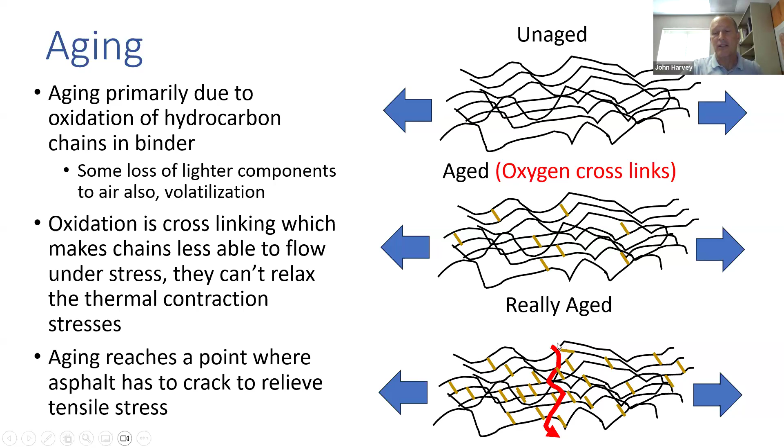Once you have enough of those and we get a contraction, eventually that tensile stress will get higher than the strength, and we get a crack that starts at the top and then propagates down to the bottom.

So that's shown here. Those of you with an engineering background, I always say I don't want to cause PTSD, but if you go back to your statics class, you remember you had one problem where you had a restrained beam with a thermal contraction, causing tensile stress, and you had to calculate what the stress was and whether it was higher than the strength. That's the same thing we're talking about here.

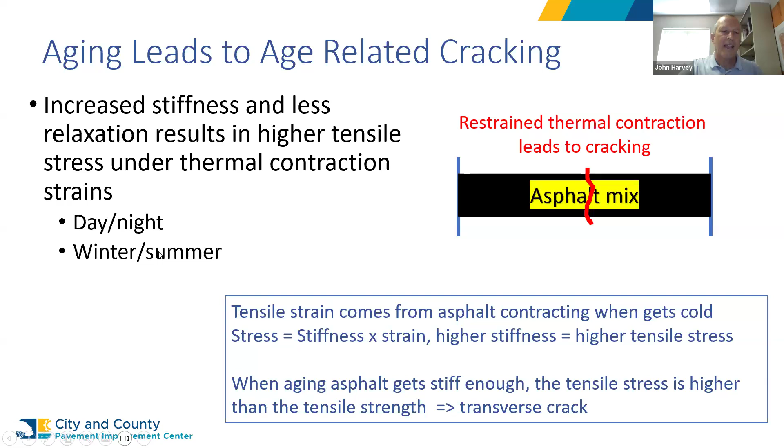But the key is aging causes increased stiffness and less relaxation. And as we have those day and night temperature changes, and it gets cold at night, gets cold in the winter, that's when we get those higher stresses.

So how much stiffer does it get? The initial stiffness - we have a rapid increase in stiffness over the first 5 years, and then we tend to reach a steady state increase in stiffness.

When you get out to about 15 years, depending on the climate region, a hotter climate region will get there faster - Central Valley, desert, Inland Empire. A cooler region will get there slower - north coast, up in the mountains, south coast.

But you get 2 to 5 times stiffer. That gives you an idea - it's 200 to 500% stiffer. And we're losing that ability to relax as well.

If we have good asphalt compaction, it makes the surface less air permeable, and good asphalt compaction is going to help slow down that aging and potentially cap off the maximum aging that occurs, because if the hot air can't get into the mix, the hot air can't cause aging.

Okay, so age-related cracking leads to top-down cracks. It cracks first in the transverse direction, then typically it will crack again in the transverse direction, almost halfway between the previous cracks. Here we can see those transverse cracks in my left-hand photo here. Got a little fatigue going on over here.

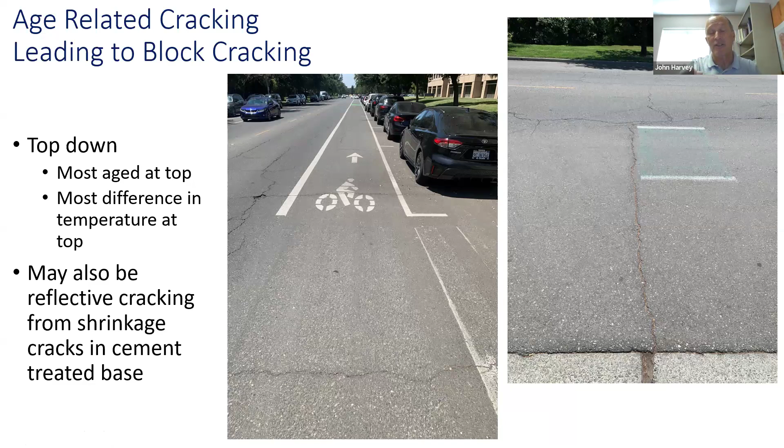Now, if I have existing age-related cracks under the new asphalt, or I have shrinkage cracks in a cement-treated base or something that's been cemented, particularly if the cement content is high, we'll get higher shrinkage. Those will reflect back up.

So, for age-related cracking, what are the strategies? Well, the first strategy is to use mixes that are softer at low and intermediate temperature. That sort of means around 50 to 70 degrees, and then whatever low temperature means - whatever your coldest temperatures are.

We need to particularly focus on softer materials in the top 2 inches, and then we worry about it to a lesser degree down to 4 inches. And if we've got pretty good compaction, we really don't have aging below 4 inches.

So one of the ways to do that is if you're currently specifying a 64-16 or a 64-10 asphalt, if you go to a 64-22, that -22 means that material is softer at lower temperatures. The -16 means -16 degrees Celsius, and you'll have the same properties with your -16 at -22 if you specify a -22.

Keep the surface protected from aging. This is what your preservation does - your fog seals, your slurry seals - but you need to do those ahead of the cracking. Those are not really there to seal the cracks for very long. They're there to slow down cracking and aging, and slow the aging process.

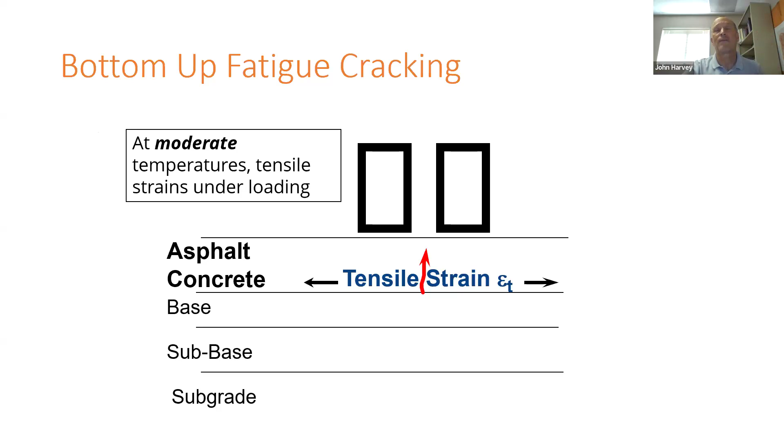Preservation does not stop or really do much about fatigue cracking. Preservation is about slowing age-related cracking.

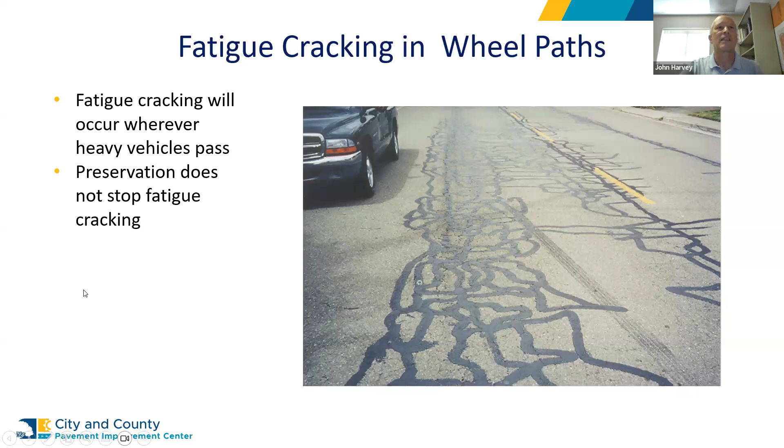So fatigue cracking in the wheel paths—there are only 3 wheel paths here because it's a narrow road, this one happens to be up in the East Bay Hills, but you can see it's in the wheel path. It's structural. It's going to happen if you have the heavy vehicles. If it happens, you need to replace the structural capacity. Preservation doesn't do much of anything about this.

Okay, now I mentioned reflective cracking. If you have existing cracking in your asphalt or concrete or cement-treated layer underneath, and you put new asphalt over the top, that is a stress concentration.

The same process of fatigue and age-related cracking—thermal expansion and contraction—is going to open and close that underlying crack, and heavy loads are going to bend over that crack. Except now it's going to go faster, both of those processes, because it's a stress concentration, and that will drive that crack up to the surface.

So if you're doing a mill and fill on existing cracked stuff, the cracking will tend to come up faster than if you had a solid new asphalt layer of the same thickness, even if it's 1.5 inches, because of that stress concentration.

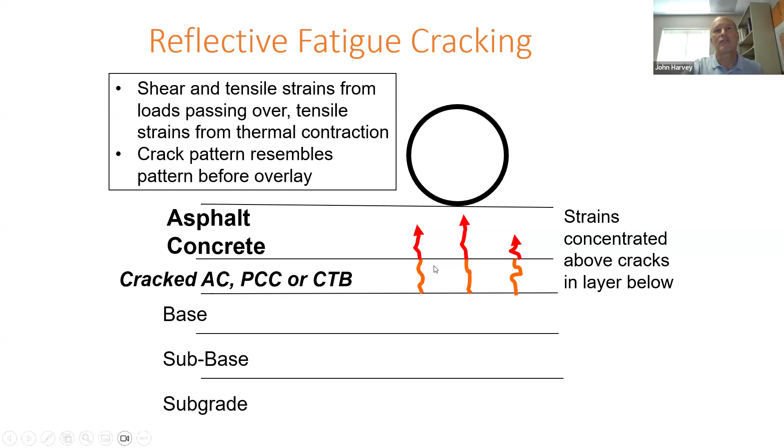So for load-related cracking, the strategies are—it eventually becomes alligator cracking, and then the pieces come out, and that's what a pothole is. Pothole is the whole end of the process.

Surface treatments again do a little bit to slow that, but really those are about age-related and block cracking. You can do periodic mill and fills or dig-outs in isolated areas if you have localized deep cracking, but these become much less cost effective once alligator cracking is extensive.

And you want to consider, this is where if you get extensive cracking, you want to consider going to the cold recycling that Dave's going to talk about—whether it's age-related top-down cracking, where you go partial depth, or you've got cracking all the way through the asphalt layers, and maybe even some contamination or no base underneath, that's when you want to start thinking about cold recycling.

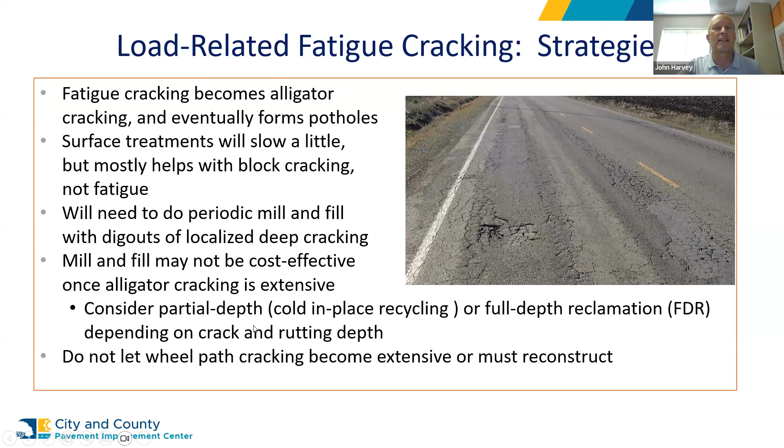So to summarize: desired mix stiffnesses—age-related cracking, which leads to block cracking, happens in all pavements everywhere, all the time. You want to be softer at intermediate and low temperatures in the top 4 inches, particularly the top 2 inches.

Polymer modification—using polymer modified asphalt on the surface or rubberized hot mix—are both great for dealing with age-related cracking because they're nice and rut resistant at higher temperatures, but they stay nice and soft at the intermediate and low temperatures. That's what the modification does.

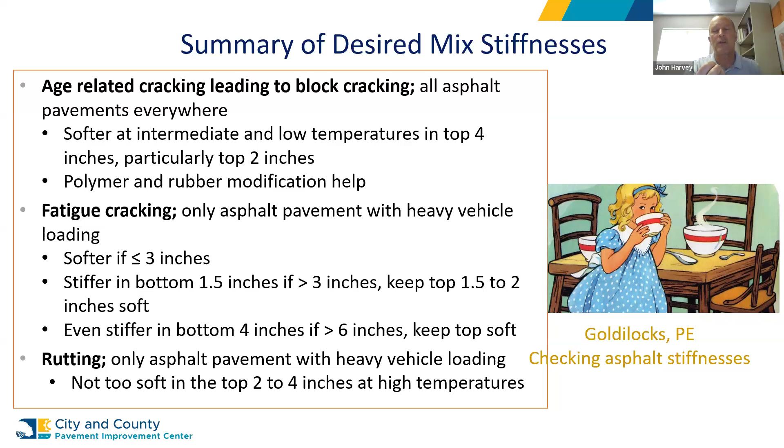I just want to mention that CCPIC has an asphalt specification available on our website. The Caltrans specification is really meant to prevent rutting across the state highway network. It's not really directly intended for residential streets. Our CCPIC HMA spec takes the Caltrans spec and then makes some tweaks on it for your residential mix designs.

Hi John, we have a couple of questions here if you have a moment to answer them. So the first question is, won't using softer oil create more potential for early age rutting?

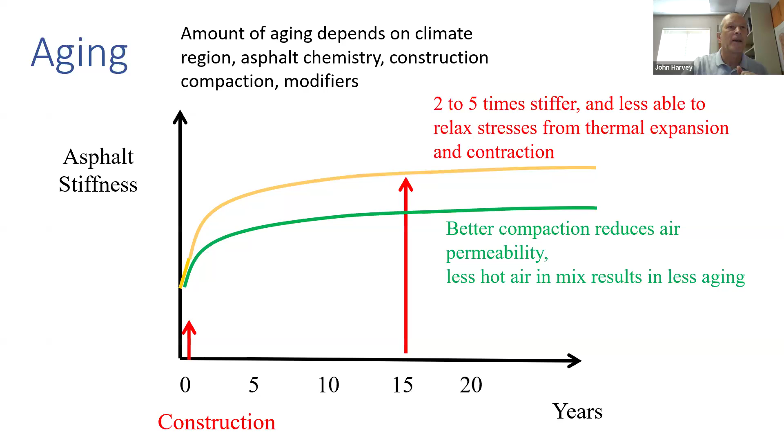Yes, well, the PG specification has 2 parts. The first part is the high temperature - keep the same high temperature of your binder. That's the rutting part, that's rutting resistance at 64 C, that's like 150 Fahrenheit. But what I'm talking about is you can ask for an asphalt that keeps the high temperature, but goes to a lower temperature on the second part of the spec. So go to that lower part of the temperature on the second spec, and you shouldn't be giving up any rutting resistance. Yeah, so that's the answer to that question.

Okay, we have a couple more questions here. Will an AC overlay that is 1.5 times the existing AC thickness control the reflective cracking?

Probably not, unless you're talking about an 18-inch existing asphalt layer and you replace the top 6 inches. If you're doing 1.5 inches, 2.5 inches, maybe getting up to 3, it will help. But remember the age-related reflective cracking is temperature-driven, and the thicker the blanket you put on that, the more you're damping those temperatures. If you've only got a 1.5 inch overlay, it's still getting hot and cold at that crack, an inch or 1.5 inches, and it's doing the expansion and contraction.

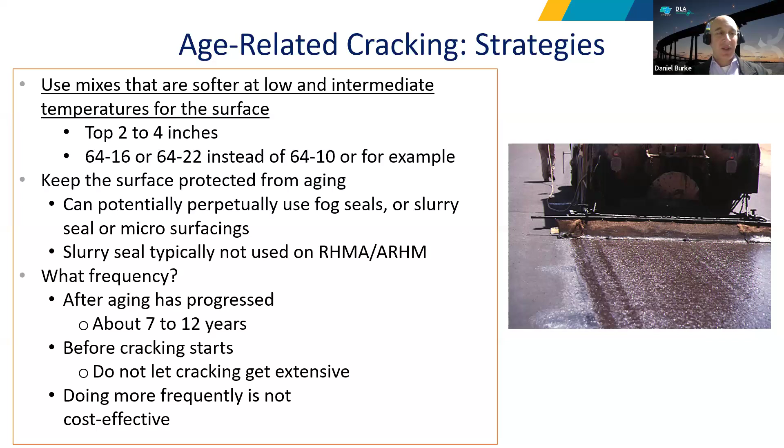Thank you, that is all the questions we have for now. Great, I think I'm going to stop sharing and hand it off to Dave.

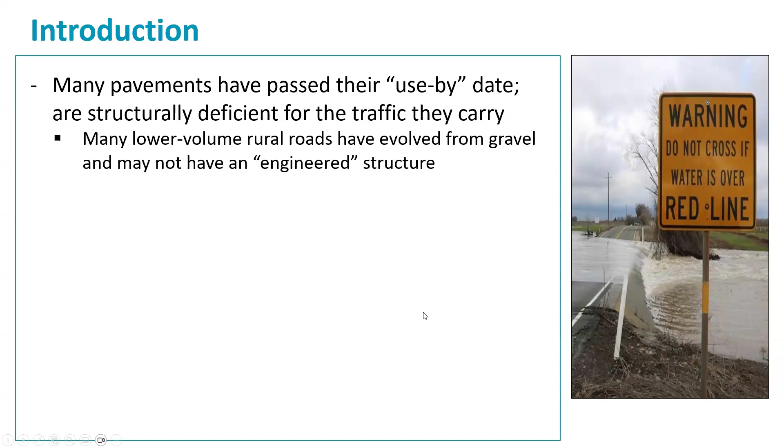So they too are having problems with the traffic that we're putting on them, and we don't have a blank check to go out and rebuild them. So we're doing the best we can with available technologies, which are typically mill and overlay or just an overlay, or a surface treatment, or whatever we can afford to do.

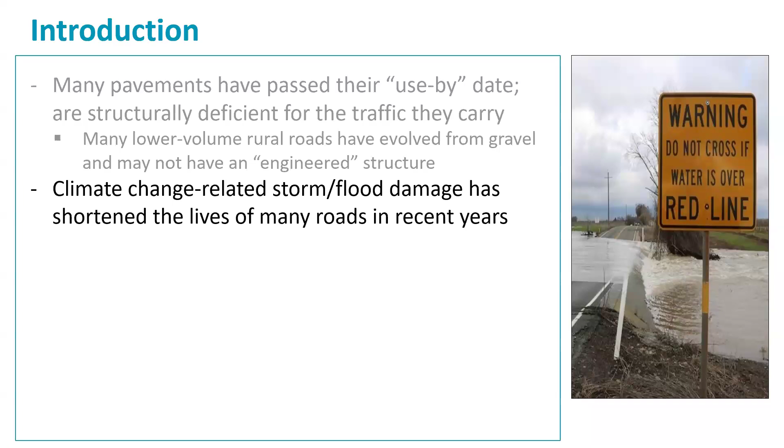Climate change is also factoring in. So we're taking those old roads that are structurally deficient, and now we're seeing more intense storms. We're seeing landslides, we're seeing localized flooding, all of those sorts of things. And this is shortening those roads and also shortening some of those treatments that we're putting on the roads. So we kind of have to come up with doing it better with less.

We need rapid, effective repairs or rehabilitation, whatever we're looking at. We need to do it at the lowest possible cost. We need a little bit more resilience out of it, so we need to make it better than it was before, to be able to handle that higher traffic and the climate issues that we're throwing at it, and all trying to keep the road user happy at the same time. And that's not an easy ask.

And what we're finding is that taking those cracked roads that John showed you, putting thin overlays or surface treatments on top of that, or milling some of the material off and putting a new overlay on that, are just not cost effective. They're not lasting very long, and those distresses are coming up. And we need to make better use of our money.

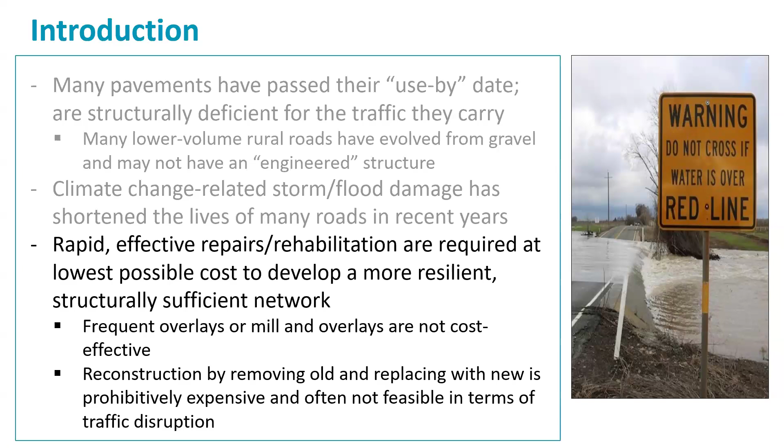The same issue in terms of, if they're completely shot and the mill and overlay is not an option, pulling out all of that old material and replacing it with new material is cost prohibitive. And generally not feasible in terms of being able to handle traffic. If you're in an urban area, people need to use those roads. They don't necessarily have an alternative route to get out of their homes and go to work.

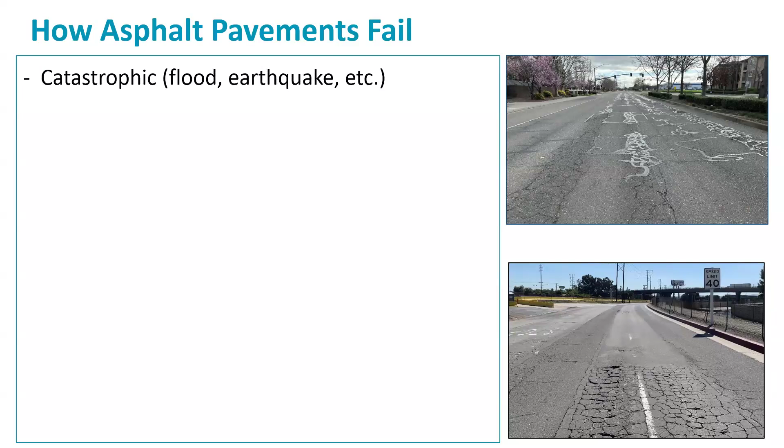So John covered the failures, so I'm not going to go into that. We obviously have catastrophic failures, we have the top-down distresses that John talked about, and then we have the bottom-up distresses. And this is where we think of cold in place recycling, because whether we have top-down distresses or bottom-up distresses, our traditional toolbox of solutions is either a surface treatment for some of those top-down distresses, or a mill and overlay or an overlay on those bottom-up distresses. The problem is that if we don't get to the bottom of the distress, then that distress comes back up again. And John went into that, and I don't need to do that.

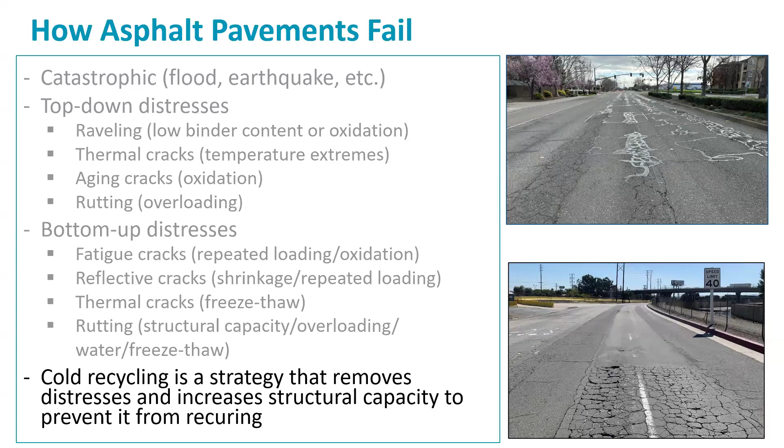But cold recycling, if we use it appropriately, allows us to remove all of the distresses. And if we can, we increase the structural capacity to prevent those distresses from recurring. So we have this situation here, and we put a thin overlay on the top there. Total waste of time, very expensive, and not sustainable in terms of using your maintenance funds.

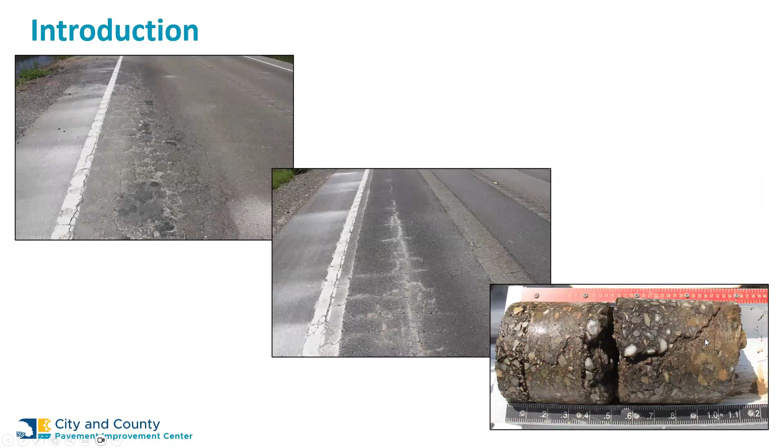Deeper problems here. We've got some serious fatigue cracking in the wheel path. We can see a lot of pumping. Doing a wheel path dig out on this, we can see that didn't work. This photograph was taken about 2.5 to 3 years after the dig out was done. And you can see what we've done is we've been fiddling around on the top here where the major problem is down at the bottom. This core was taken out of this layer here. So we really want to make sure that we get to the bottom of this distress so this sort of thing doesn't recur. So that's also just temporary, not sustainable.

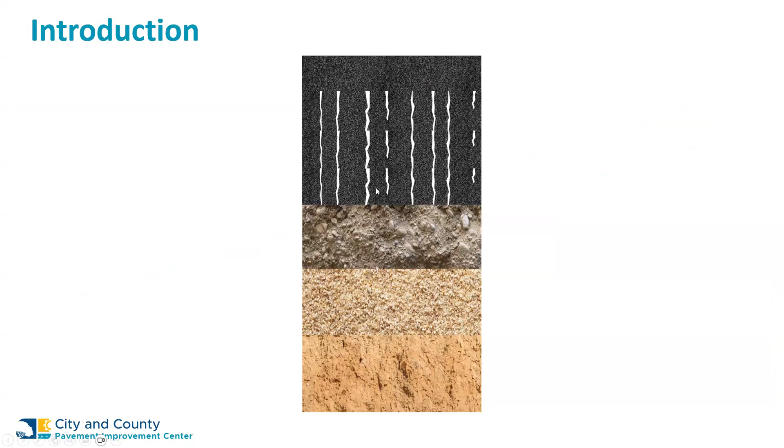So if we do it as in a schematic in this picture here, and we put an overlay on the top there, or we mill some of it off and put an overlay on it without getting to the bottom of it, that is, like we said, temporary, expensive, unsustainable, simply for the reason that those cracks are just going to come back up again because we're taking care of the top when the problem is down at the bottom. So really what we want to do is recycle all of that material.

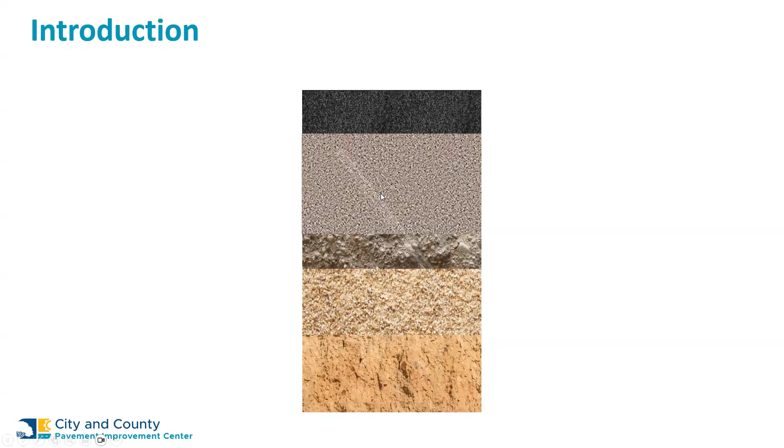There's nothing wrong with the materials. They're just aged and they're a little deficient in terms of structure. We can add a recycling agent to this recycled layer, get rid of all the distresses, put a new surfacing on top there. And that's really what we're looking at, because we believe it's going to be much longer lasting. It's going to be more cost effective, and certainly sustainable in terms of how we use our maintenance and rehabilitation funding.

So let's touch a little bit on the types of cold recycling. I'm sure you're aware of terms like cold in place recycling, full depth reclamation, deep in situ recycling, cold foam in place recycling. There's probably 100 acronyms for all of these things, and those are all legacies of history.

Equipment manufacturers adapted existing equipment to do recycling. They would take a milling machine and add an emulsion bar to turn it into what we'd call a partial depth recycler, able to handle the top 3 to 4 inches of material and give us a recycled layer. They would take a stabilizer or reclaimer, add some bars, change the teeth configuration, and give us a machine for full depth reclamation.

Since recycling has taken off, the equipment industry has done a lot of developments on their machinery. We have a single machine that can go anywhere from 3 inches to 12 inches of material, throw it out the back, and give us a good layer we can run through a paver if we wanted. We still have the modified wheel versions that can crush aggregate and move material around a lot.

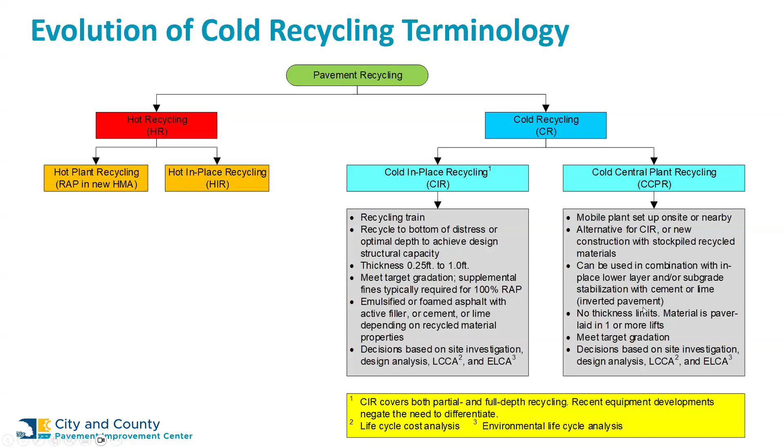So we have a lot of tools, a lot of ways of doing it, but we can achieve a lot of things with that. If you haven't seen it—and I'm sure most of you have—this is a quick example of a machine.

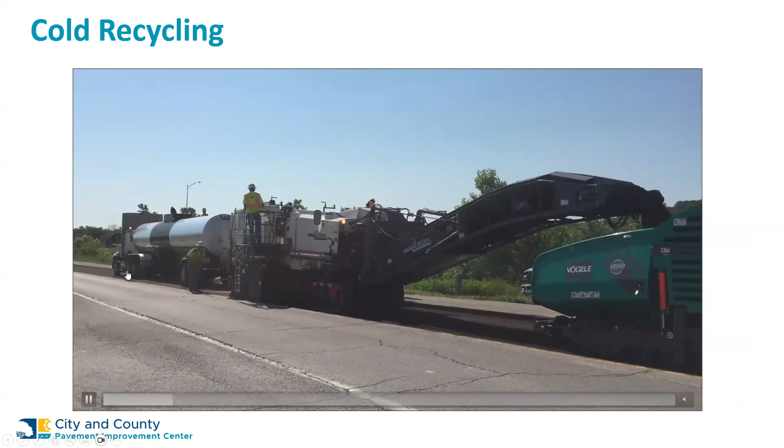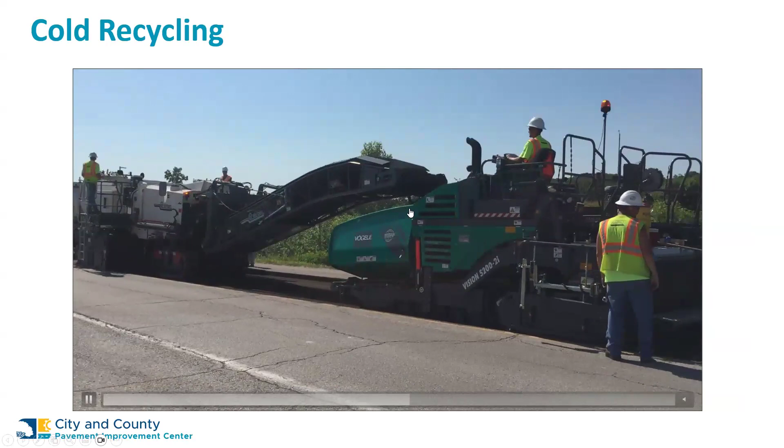So we spread active filler out the front if we need to. We run emulsion or hot oil in a tanker through the machine. It mills up and processes that material, either putting it out in a windrow or dropping it straight into a paver at the back, which puts it down in a nice mat.

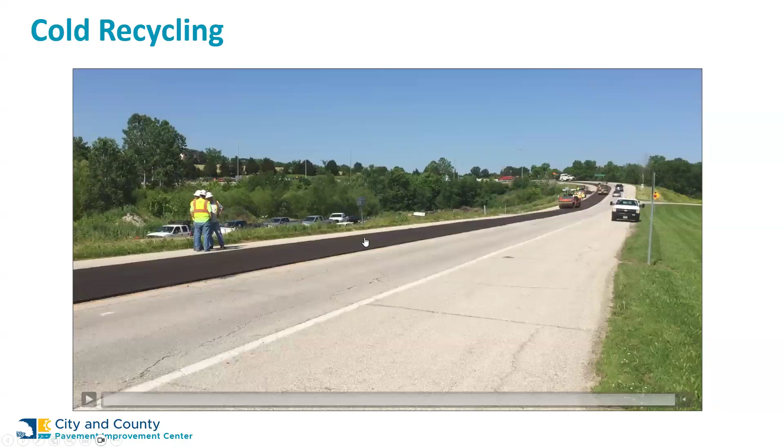Let me fast forward here so you can see the compaction. We have rollers at the back there, and we'll be able to put temporary traffic on top of this layer for 10, 15 days, a month or so while we finish the project. You can see the distresses popping up here—literally we can turn an old broken up road into a brand new road at walking pace.

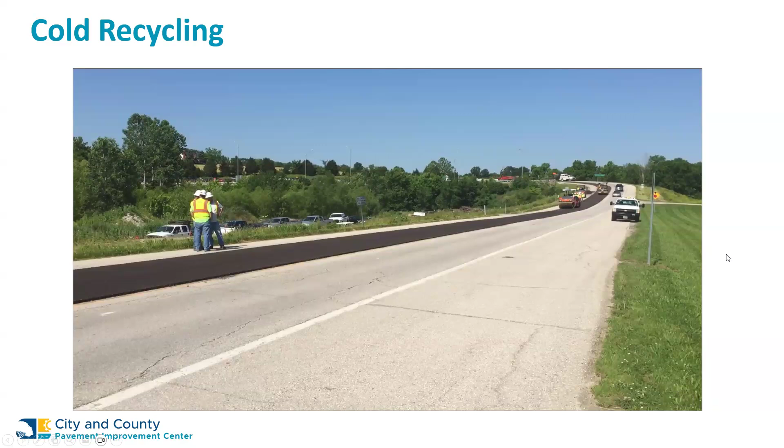Really, really good strategy. We can alter the depth and the recycling agent depending on what we want to achieve with that road. We can do it in urban areas, we can do it in rural areas, under traffic.

Really quick, and the beauty of it is we're using all of our in-place materials, and we can get traffic on here really quickly after we've finished at the end of the day. Within an hour or so we can put temporary traffic on the road and then come back and pave it later. We do generally need a thin surfacing on top just to keep it all in place.

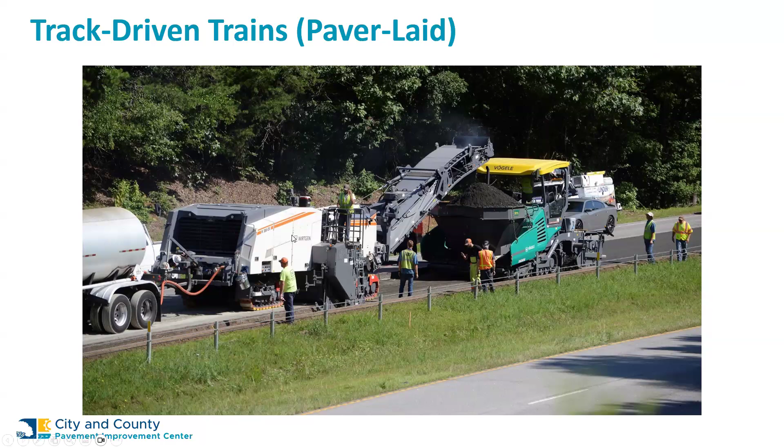Thank you, thanks Dan. I've pretty much covered this one. So that is one example of a new generation recycling train to do full depth. This is something that more of you might be a little bit more familiar with - still really good machinery. It only has an 8-foot wide setup here, or a 2.4 meter drum.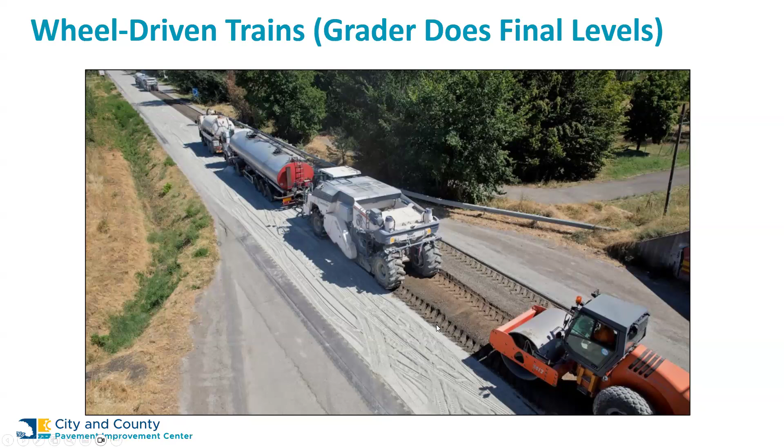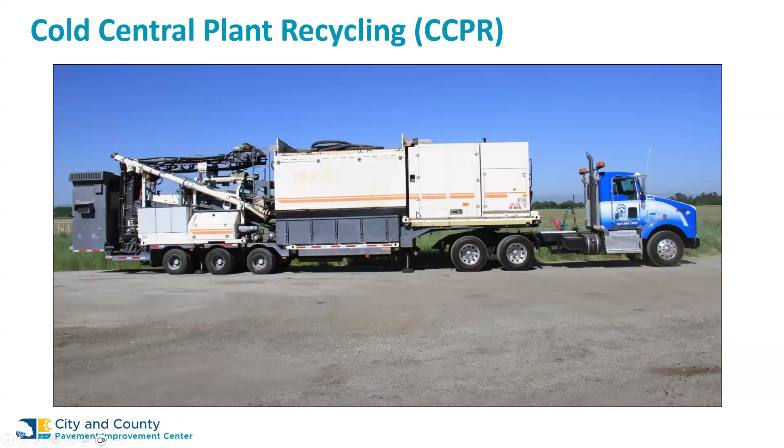And then the cold central plant, this is one example of them. There are 2 or 3 available out there, but this is one. It will handle 240 tons an hour of material. It's street legal, doesn't need an abnormal permit, and takes about an hour to set up. So really quick and an efficient process.

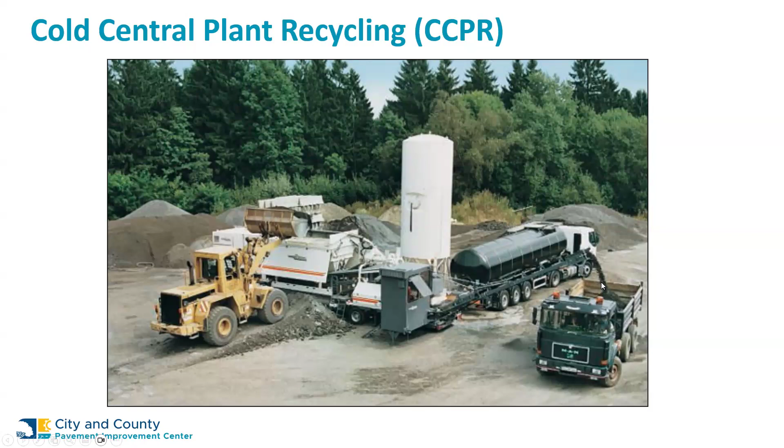This is kind of what it looks like. So your trucks bring the millings off of the project, dump them on a pile. They'll usually run them through a crusher, add the materials to a hopper. We have cement here for our active filler. We have asphalt, either hot oil or emulsion, that we can add to it. And then this process just churns it out and typically throws it back into the truck that just brought the rap millings, and it goes back out to the project and is paver laid like you would do with hot mix asphalt, which opens up a new area as well.

Around the country, and certainly in California, we know down in the Bay Area that we have huge issues with places to put all of the rap that we mill off our roads. Why not use that in new cold central plant layers? So if you're doing reconstruction, new construction, lane addition, new residential areas, we can make use of this cold central plant as an alternative to traditional construction, and get a new life out of that material.

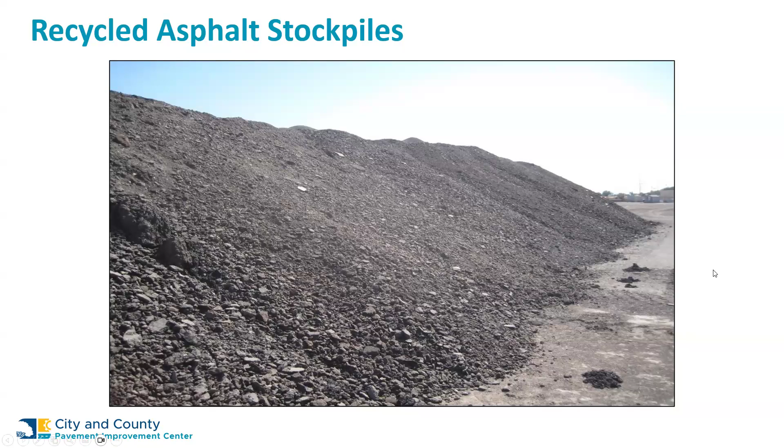Then comes the question of which recycling agent or stabilizer do we use. If we're processing 100% rap, then we stick with asphalt treatments. We either use emulsified asphalt or foamed asphalt. They're going to give you essentially the same result at the end of the day, so we can't say one is better than the other. There are instances when it's probably better for the contractor to use an emulsion, and there are going to be some instances where foam is better. Certainly in terms of the Caltrans specifications, they leave it up to the contractor to decide what recycling agent they want to use, but they're both good.

We also try and encourage adding some fines. 100% rap tends to be a little coarse, so just a low percentage of some finer material helps with the active filler cement that we add down there, just to get a good tight gradation.

If we're going into the unbound layers underneath, we have options. We can do nothing if it's very low volume traffic and we've got good materials down there. We encourage the use of some kind of treatment. So if you've got good engineered materials there, then we'll use asphalt treatments on that. If we've got more marginal materials, high fines content, some clays in there, then obviously we'd move more towards the cement.

The most important thing we're telling people is, don't base your decision on cost, base your decision on the material properties. All of these stabilizers and recycling agents are good, but you've got to use them under the right conditions. You can't just say, well, cement's cheaper, so I'm going to use cement, because that could result in expensive maintenance down the road. If you've got good quality materials and you add cement to them, the cement doesn't really have anything to do but get really strong, and in the process very stiff and brittle, and you run the risk of having some extensive shrinkage cracks in there.

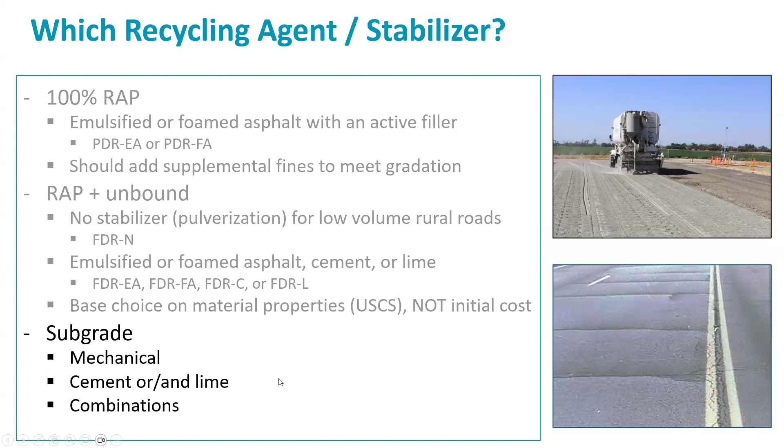So we encourage having an understanding of the materials. We suggest running some basic tests on it to come up with a unified soil classification system, and base your decision on that, which will give you the best possible life out of your pavements. Obviously, if you're doing a combination of cold central plant recycling with underlying stabilization, then cement or lime is usually your primary go-to solution for that.

So here's the basics. If you understand the unified soil classification system, it's based on some very simple laboratory test results. They give you a whole range depending on your gradation and plasticity of the materials. And you can see with our good quality engineered materials, the foamed asphalt and the emulsified asphalt are the preferred choice. Three blocks means good, one means be careful - you want to make sure you're still within the requirements. And then on our more marginal materials, especially on full depth where we're going into the underlying layers, maybe bringing up some clays and a lot of fines, then cement is going to be good.

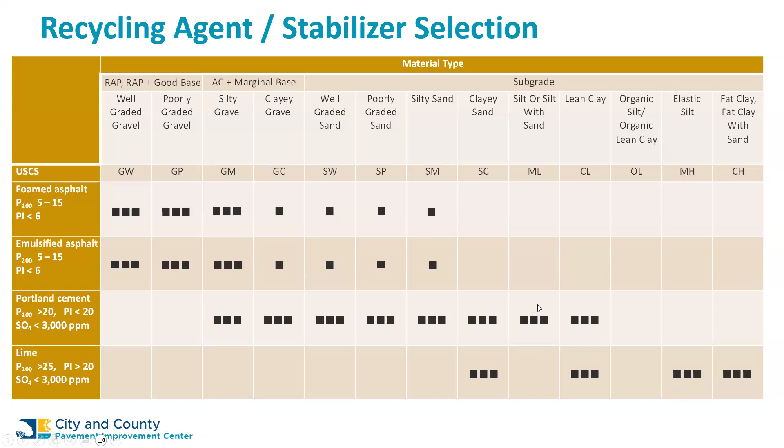With very high clay materials, we'd be leaning towards lime first and then maybe cement after to get the strength. So it's an engineering decision, not just a 'well, I feel like doing cement, so I'll do that.'

So moving on from that, with the background, here are a couple of reasons why you should do it, and these are the sort of areas where I think it's an issue.

This is a project that was done down in Southern California in an industrial area. It was a cold central plant study where they actually turned this really shot road into something that looked really good - 100% reuse of the in-place materials, and just a relatively thin surfacing on top.

So everything we're talking about is actually proven. It's out there in the field. We've got 25 years of experience in California, longer internationally. Caltrans has put a lot of money into doing research on this. So everything we're saying, we can back it up with data and experience.

There are cold recycling strategies for almost any pavement problem. So show me the problem - I'm pretty sure I can come up with a cold recycling strategy to help you there.

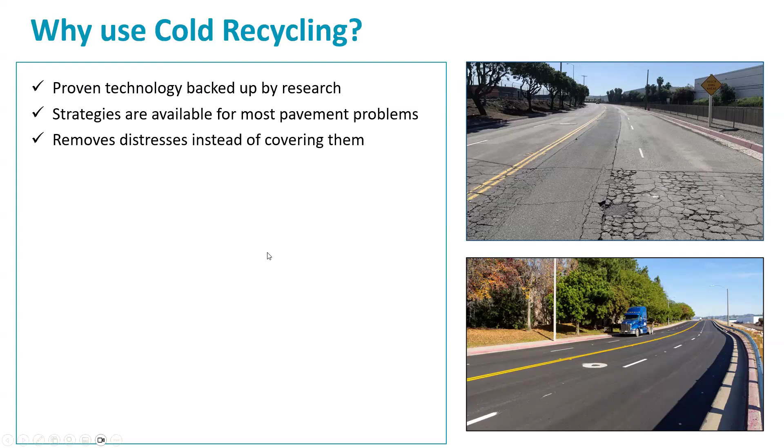One of the most important things, I believe, is it removes the distresses. It doesn't cover them, and that gives us longer life in the pavement.

We have selected strategies that can increase the structural capacity. If we're going deeper than the distresses, mixing up more materials with our recycling agents, we can get structural capacity. If we do a combination of stabilization with our cold central plant recycled materials, we can get a significant improvement in that capacity.

Shorter construction times, less traffic disruption - that's really important, both from a safety perspective as well as a cost perspective. We definitely get extended pavement life by removing the distresses as opposed to covering them.

A big thing for all of you folks that are cash strapped out there - we use all of those existing materials. We've already paid for them. Why take them out and put them on a dump site or use them as low cost shoulder backing or something like that? Let's make use of all of our materials and keep them in the road.

As opposed to taking them out, we require very limited new materials. We might want to add some supplemental aggregate. We certainly need a thin surfacing on top of it, but not nearly as thick as some of our heavy duty mill and overlays that we need to do for a rehabilitation project.

It's definitely more sustainable if we design and build it correctly - removing the distresses, not just covering them up.

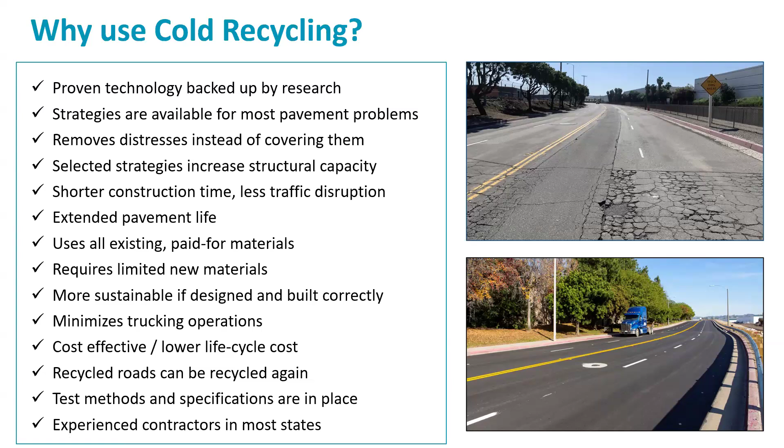And then again, importantly, we do have experienced contractors across California that can do a good job and are well aware of how to do it.

Put another way, if we compare our traditional remove and replace strategies with our cold recycling strategies, some pretty clear differences here. Remove and replace is what it is - we remove and replace those layers. Cold recycling, we recycle to the bottom of the distress. That's a big difference there.

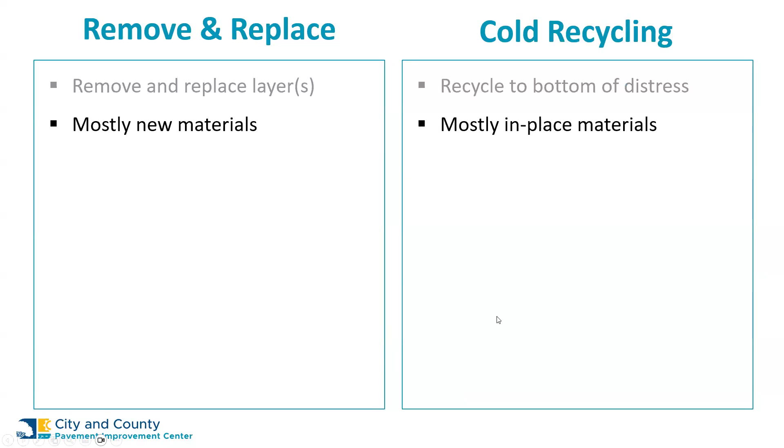Remove and replace, we're mostly bringing in new materials. Cold recycling, we're using pretty much everything in place, just bringing a new thin surfacing over the top of it.

As we go deeper with remove and replace, trying to get as close as possible to those distresses, the deeper we go, it gets more costly and more complex in terms of construction. With cold recycling, no difference whether we go 4 inches or whether we go 12 inches on an in-place recycle.

The only change that's going to come is with the additional recycling agent and active filler that we need to put in to go to that extra depth. The complexity doesn't change, nor does the time it takes. So as you see, the deeper we go, the longer the project duration, the more road closures we've got to have, the more disruption to traffic.

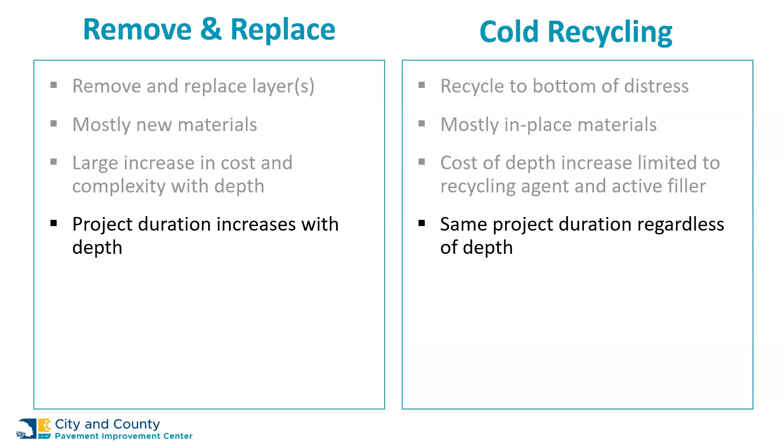With in-place recycling, the duration stays exactly the same regardless of the depth. And if we do a cold central plant, that's also quick, because as we take those materials off, we process them and put them straight back again. The construction traffic for remove and replace - the deeper we go, the more trucks we put on the road. For cold recycling, it's the same amount whether we go 2 inches or 12 inches.

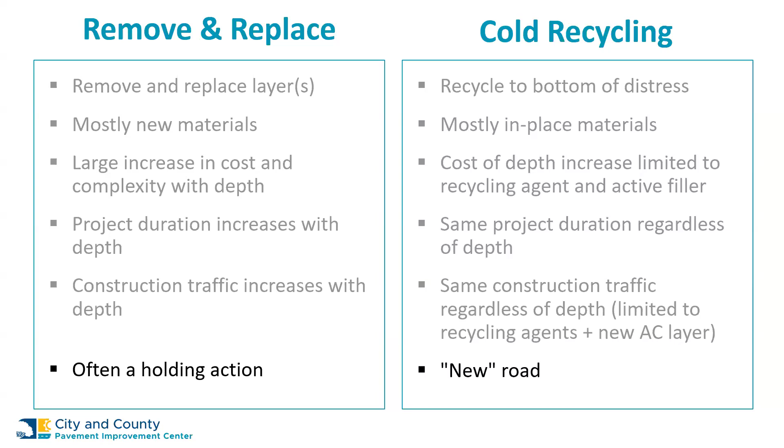At the end of the day, a remove and replace, if we don't get to the bottom of those distresses, is essentially just a holding action. Cold recycling essentially gives us a brand new road to start off with. It is hopefully structurally sufficient for the amount of traffic we're going to carry. So we minimize the amount of new materials we have to bring in, minimize the amount of trucks we put in. We can do it under traffic, and it's really quick - we can put traffic back onto that surfacing within a couple of hours.

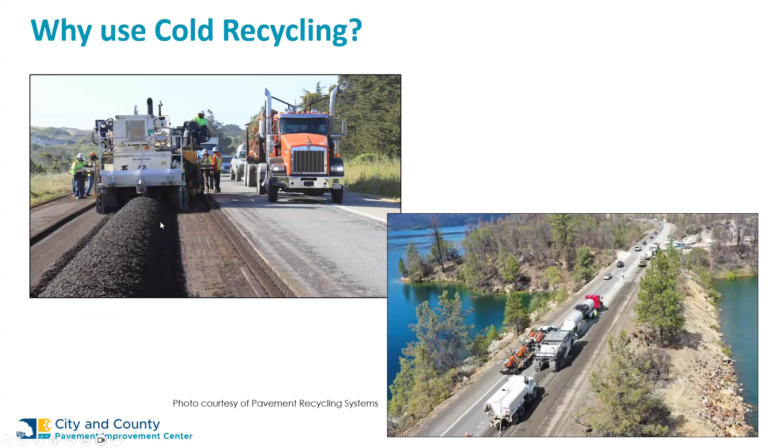We did have the question about utilities. They are an issue, we certainly have to take those into consideration. We obviously don't want to run a recycler through a gas pipeline. We need to know where those utilities are. It is common practice, standard practice, if we're doing an in-place recycle, to drop those manholes down below the recycle depth, put a steel plate over them, do the recycle, and then come back - obviously mark them, we know where they are with GPS - and then go back, open up the road, and just bring up the manhole cover. So it's not a delimiting factor, we can work around those.

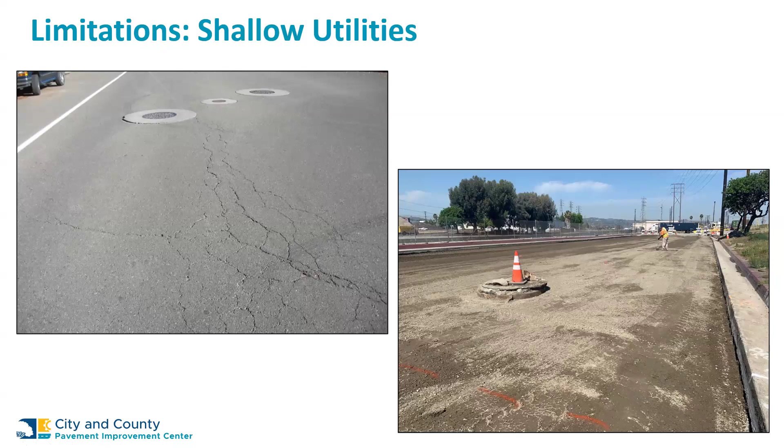Obviously, if we're doing cold central plant, we can actually pave around these and do a little bit of hand labor around the manhole itself to accommodate those. So a little bit more problematic, it can increase the cost slightly. We're going to have the same issues if we're doing a mill and overlay as well, so certainly not an excluding factor.

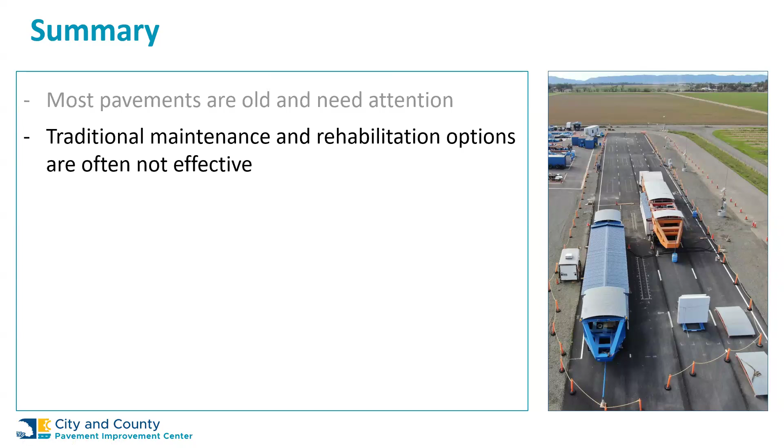So I think we're getting close to time here. Just to summarize, we know that most pavements are old and all of them need attention, whether it's a preservation treatment, maintenance, or rehabilitation. The traditional toolbox isn't really helping if we can't get to the bottom of distresses that have been around, or if our pavements are structurally deficient. If we restore them back to their original structural capacity, that's not going to be good enough for the extra traffic they're carrying today.

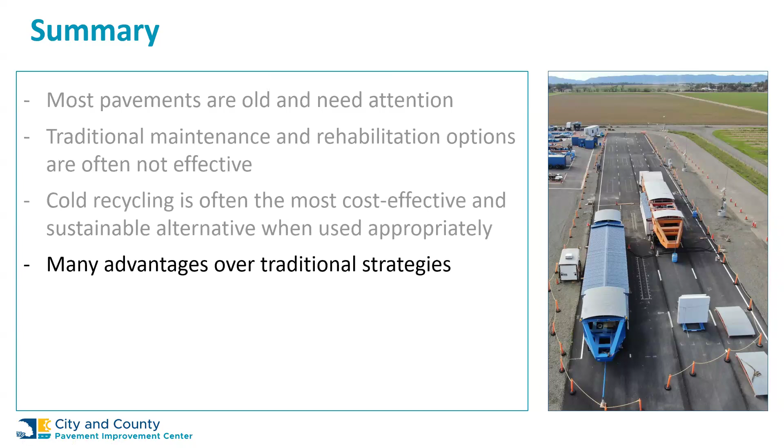We believe that cold recycling is probably the most cost-effective and sustainable alternative, as long as we use it appropriately - use the right strategy, get to the bottom of the distress, use the right type of recycling agent. Lots of advantages over traditional strategies - I'm not going to repeat those, we just ran through that whole list.

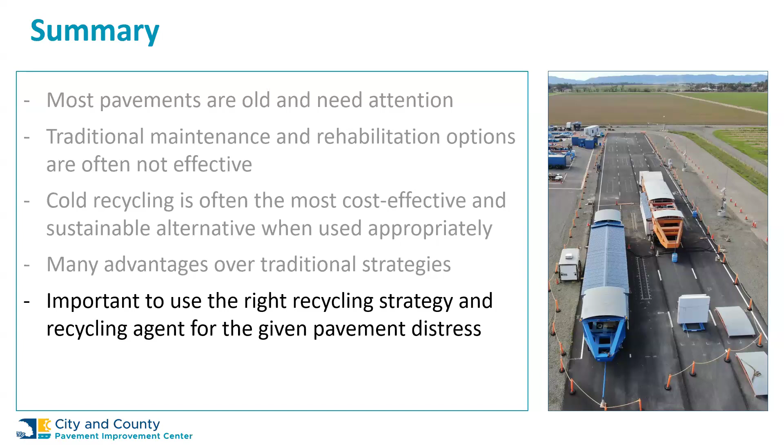We do want to emphasize that we must use the right recycling strategy, so there is still engineering involved in this. We've got to do a bit of investigation, understand how deep our distress is, understand whether it's top down or bottom up. And we've got to make sure that once we understand how deep we're going to go, what that recycled material is going to look like, and whether we use an asphalt treatment or a cement treatment. There is some engineering judgment required in that.

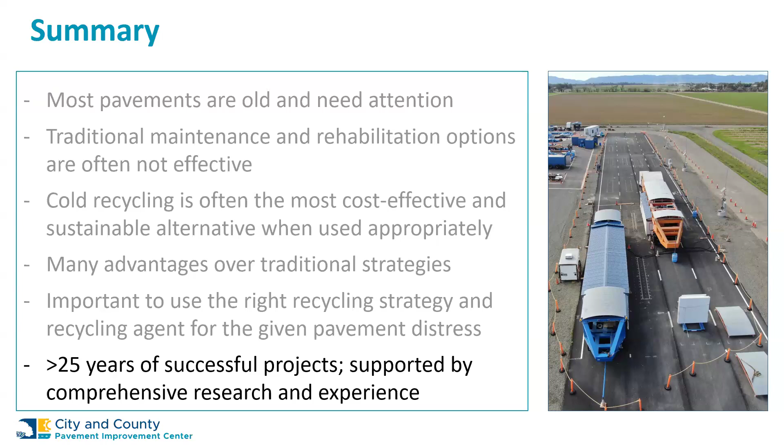But there's more than 25 years of successful projects at state level, city level, county level. Everybody's used them and are doing them and are happy with them. Supported by that comprehensive research and experience that Caltrans has invested in, we believe it's certainly something you should be considering, and we believe you'll be happy with the result. I'll leave it at that, and we can take a few more questions.